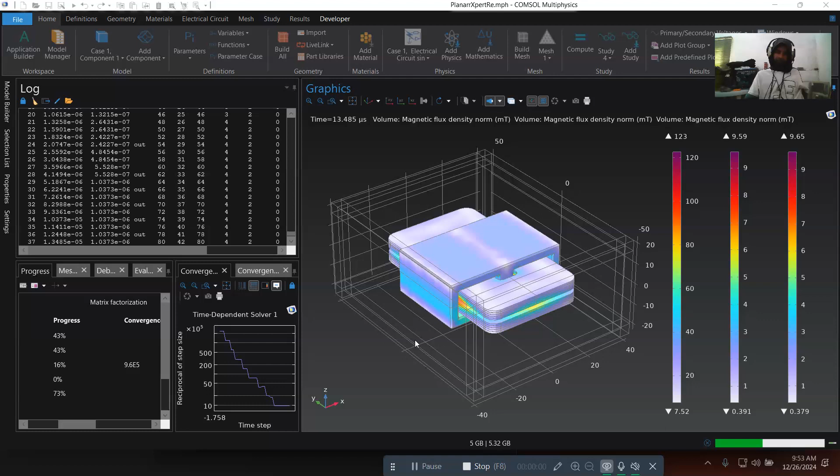Okay, so simulation at 43%, and I notice we're reaching close to a half cycle. So I just want to show the voltage. This is 18 volts, and we have here 14 volts. So you're gonna get a perfect 1-to-1 ratio. So this is really good so far.

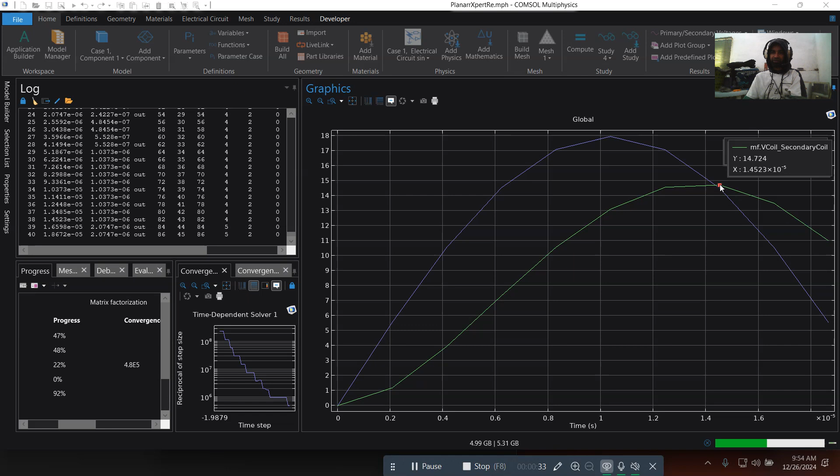14.74, well, 24. You notice I have some high steps, like 2 microseconds steps are set for. It will do pre-adjustment, you can see it here. Yeah, so it's just only 2 cycles doing. And we can see what the voltage settles down to be.

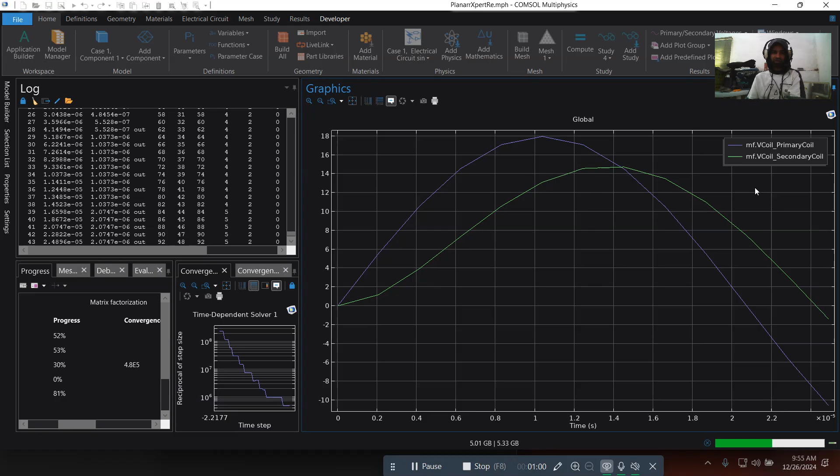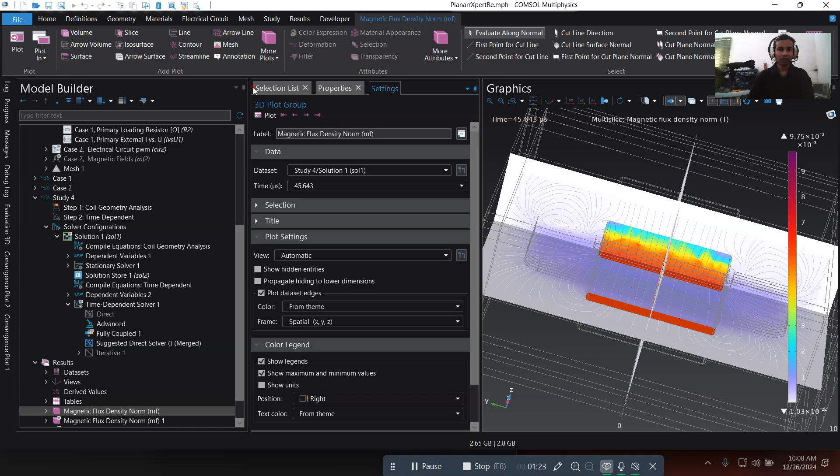Okay, so this finishes here. Let me take a long hard stare at this result. Hide this guy, hide this guy. Pull up the model builder and settings. Right, so you can narrow these guys down, close these guys.

Okay, so we just want to look at the results. I will go to voltage. As I said, do 2 cycles, and that was it. Right, so 1 and 2. So we have, this is the voltage input is plus minus 18 volts, and the coupling we have like

14.682, right? And yeah, call it 14.5 or something like that.

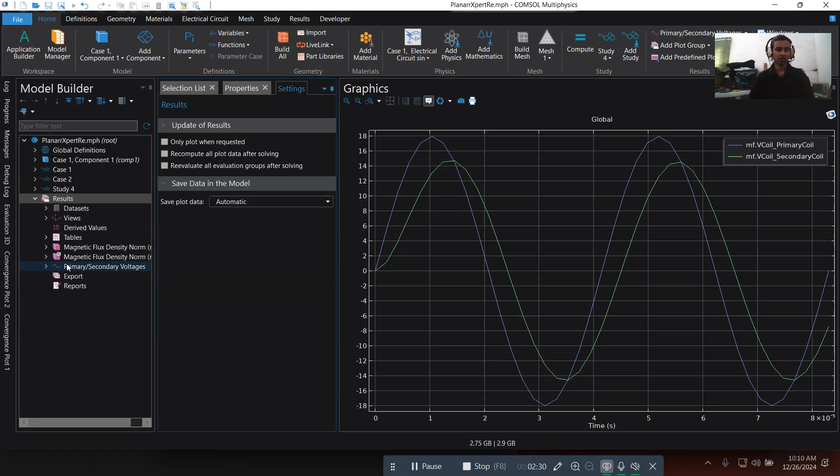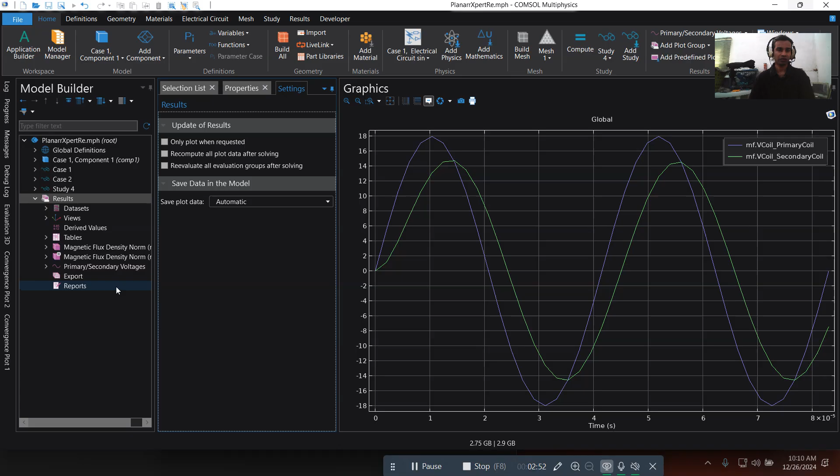Let us look at, we have a resistor for load, which is, we have a resistor for load. And I basically did not, wow, I don't think I'm supposed to have this resistor

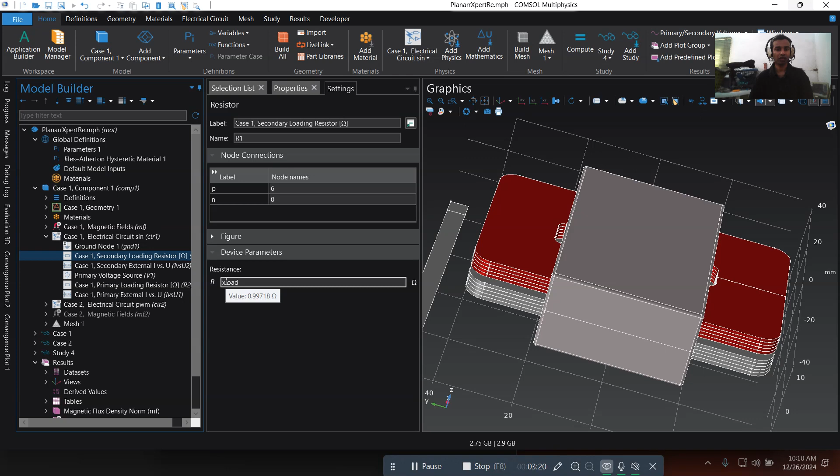divide down by, I wonder if I have it. I will know now. Supposed to be down to rload. Okay, this needs to go down to be less than that. This has to be in p, right? So this is supposed to go down to 200 microohm, 200 milliohms, right? Sorry. So this is supposed to be 200 milliohms.

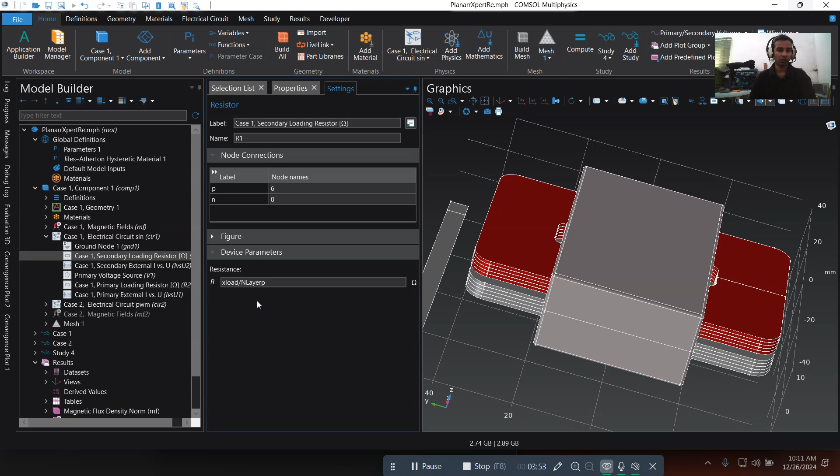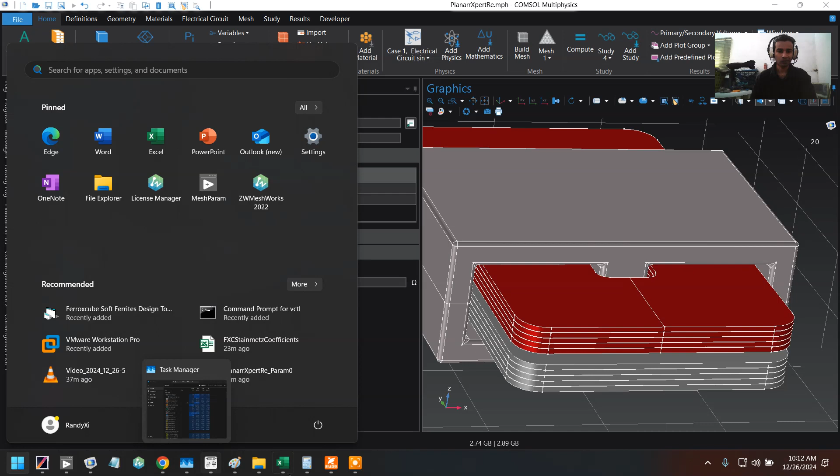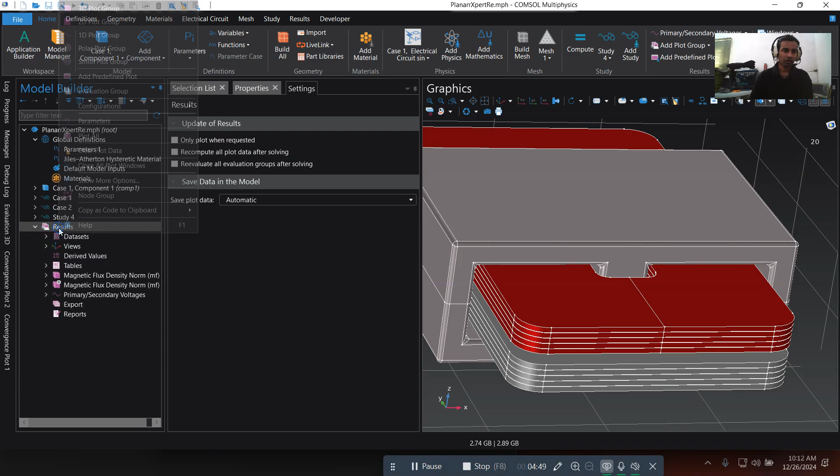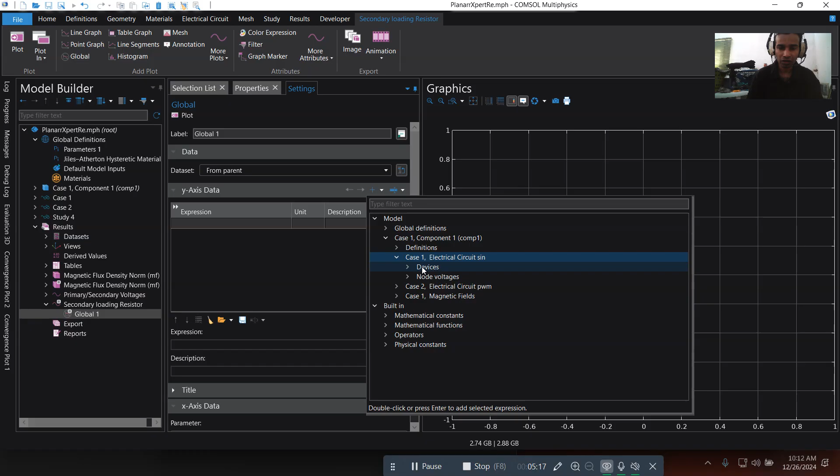So we're going to look at this resistor, is R1. So we look at resistor R1. Secondary loading resistor. And we'll give it a global plot. You go to the circuit, case 1, and we will go to R1 and we'll look at the dissipated power on that. So dissipated power on that is 220 watts, so that is 14 volts,

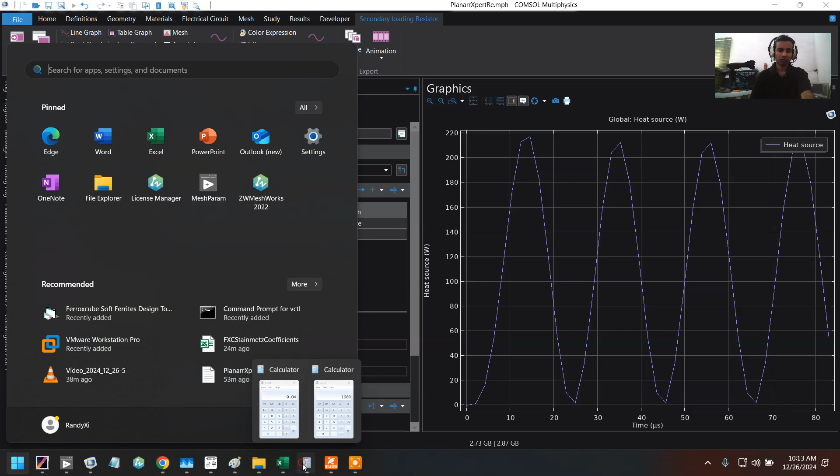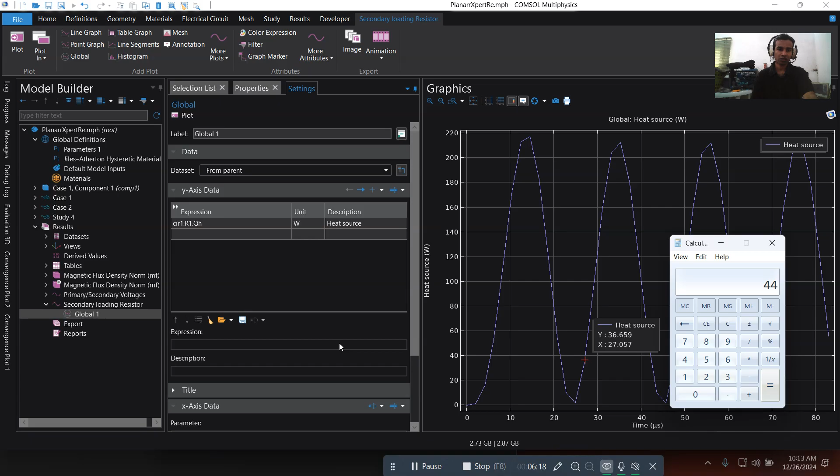right? So this will really be 14, let's say 14.5 volts, divided by 0.9987 something something, whatever. So we have that. We parallel, I'm not sure how it represents across all, but I will determine that afterwards. So if I say 220 divided by 5, 44 watts. So I will look into that, right?

And I had to do the proper loading on this. So that was that. Okay, so that the voltage, look at the flux density, right?

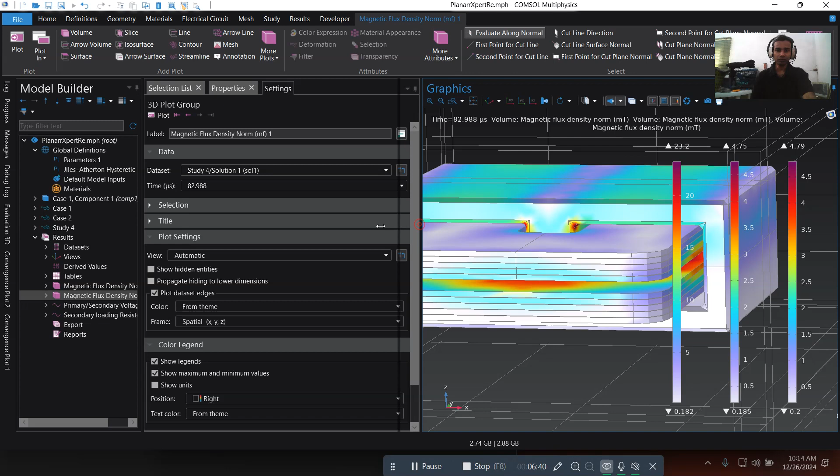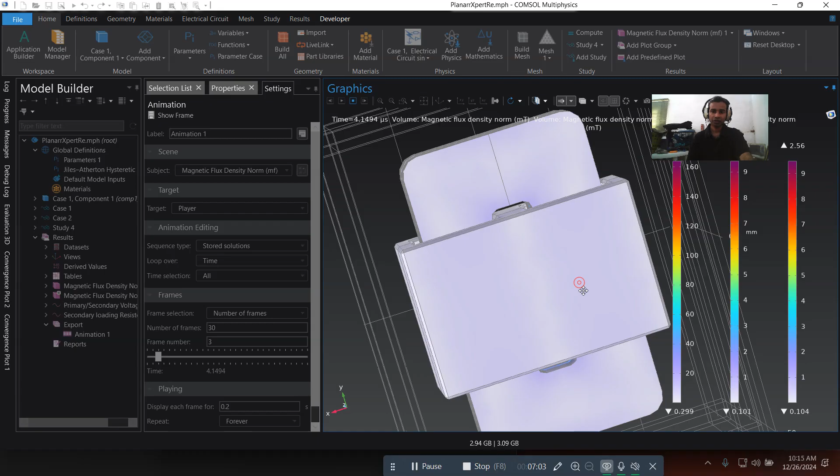Right, so we have the flux density here, and we can see we have an even distribution. Go to here, same thing here. Now you're going to notice something over here. The flux density on top. About that and about that, right? So both of them,

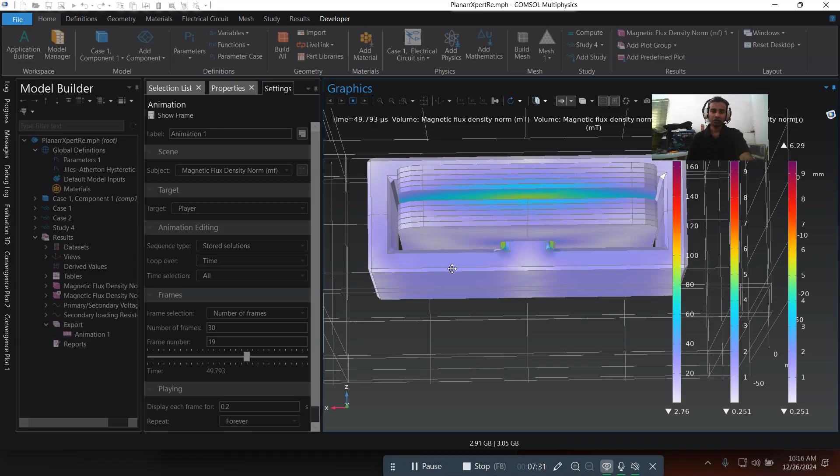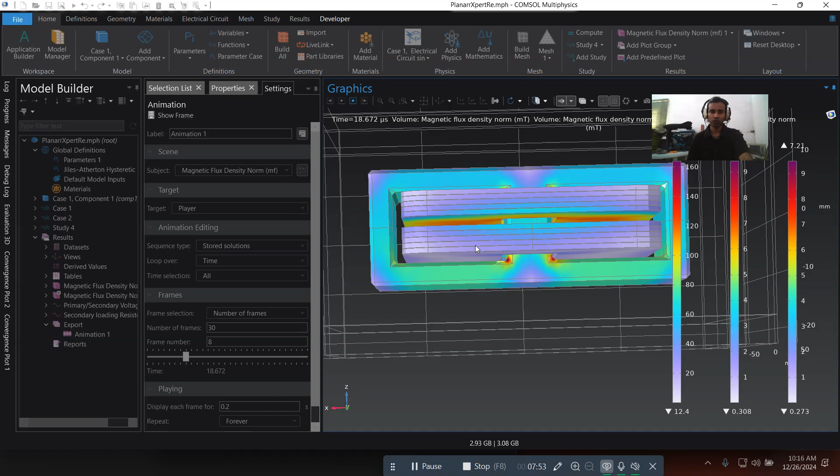let's get this in alignment here. Right, you can notice one fading out and this one appearing. Now the reason for that is the primary coil is generating a magnetic flux that induces itself onto the core, and the core will take that around and induce it in the secondary. So we send in a current to excite the current flow on the primary coil, and we get a magnetic field that will excite the core, and the core will excite the secondary side. And we have a current flow due to the fact we loaded with resistors.

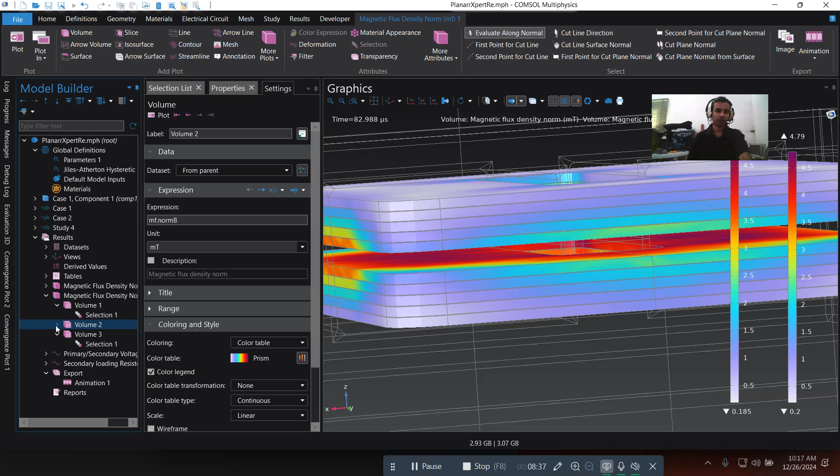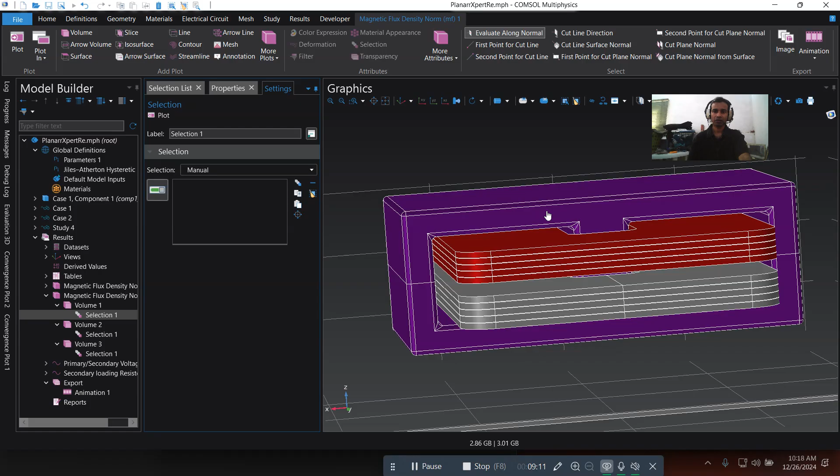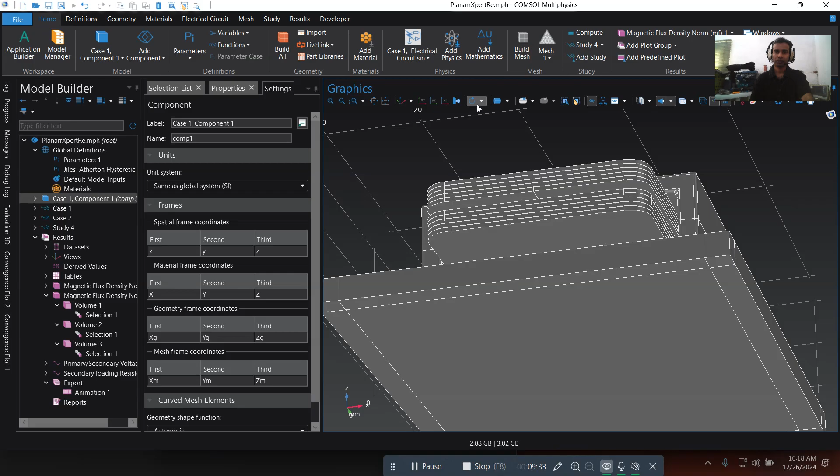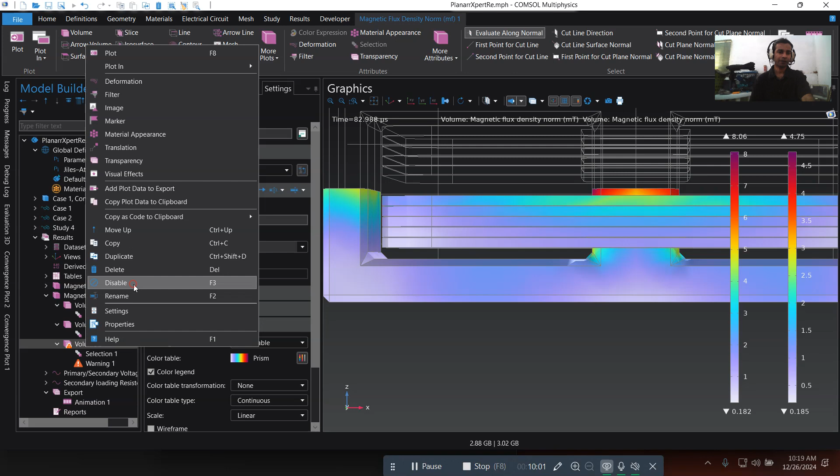Okay, this is what's going on here. I need to clear this box out of the way. Select domain, right. Right, let's come back here now. Right, so that was the issue there, and I will put secondary, in fact I need to put all those guys. This one I will disable this for now, right? And let us go back to animation.

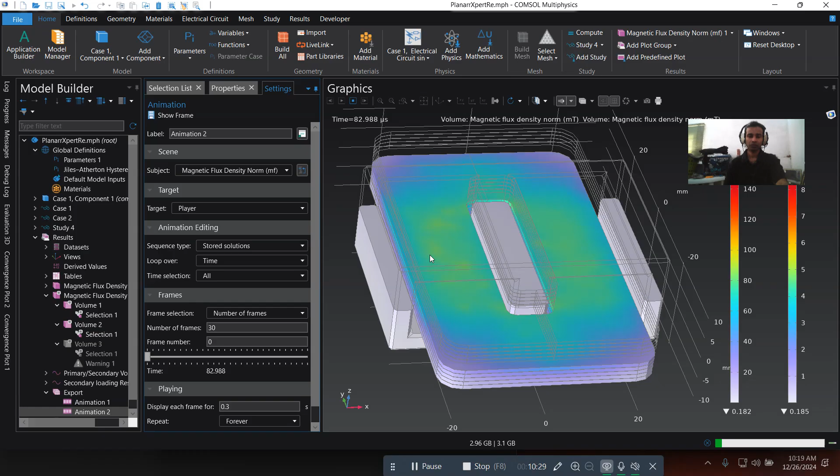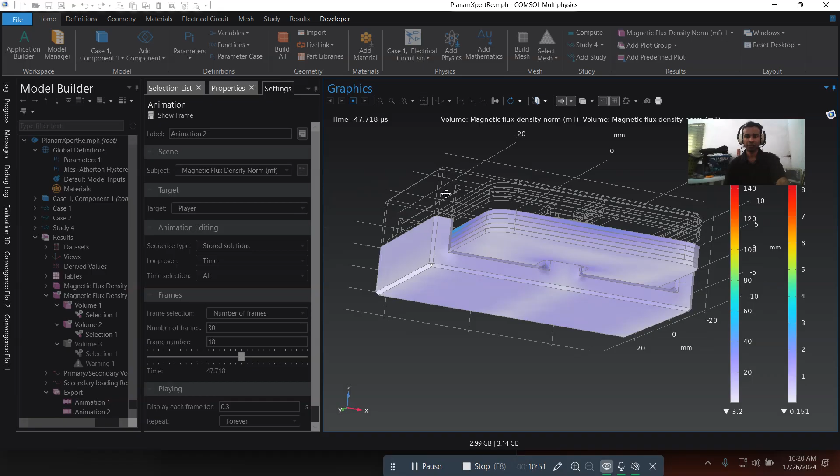Right, as you can see, the density in the core is being excited. This is the primary, right? So this is how it should be, not the garbage I had before. Many mistakes were made. Right, so this is perfect. And it actually works—before it wasn't getting voltage because of those issues with the geometry, and so that's that.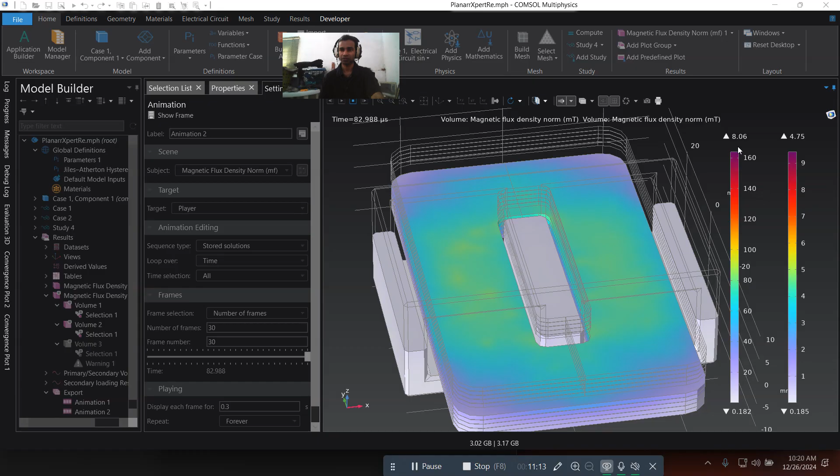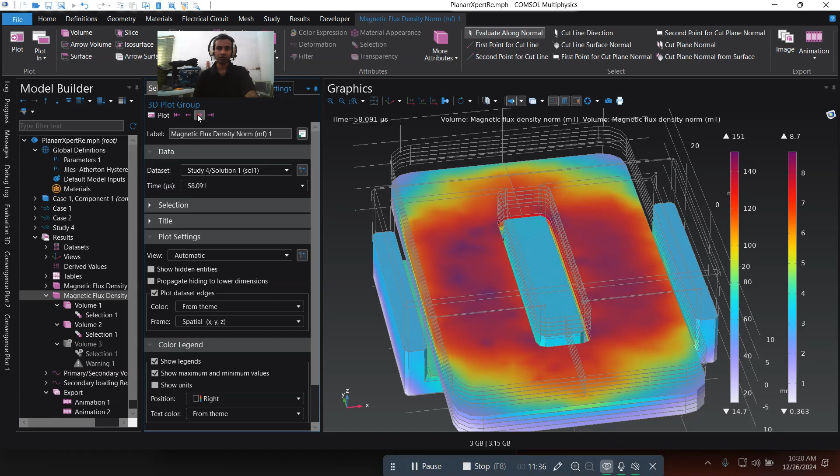We have the millitesla reading. The highest we have is 160 something. I'll try to stop it at the highest. Right, so let us go back here and skim through. Right, come back here. The highest is about here. This region here, we could just move this across the chart, and you can see the 160 around here. If we click here, we should see.

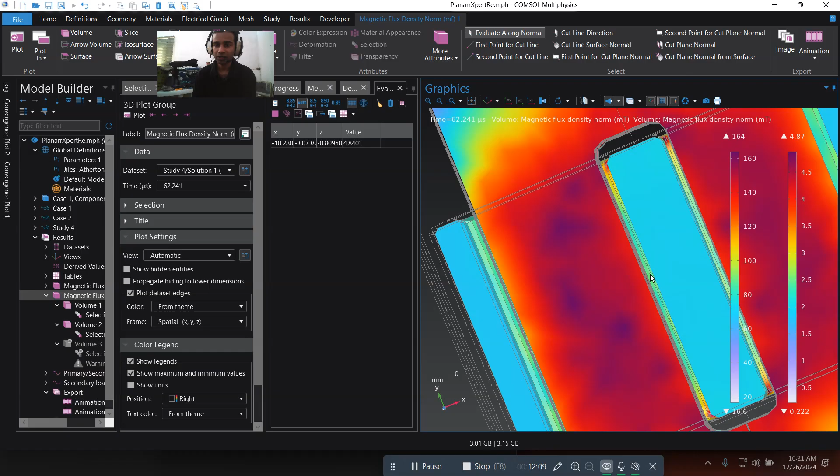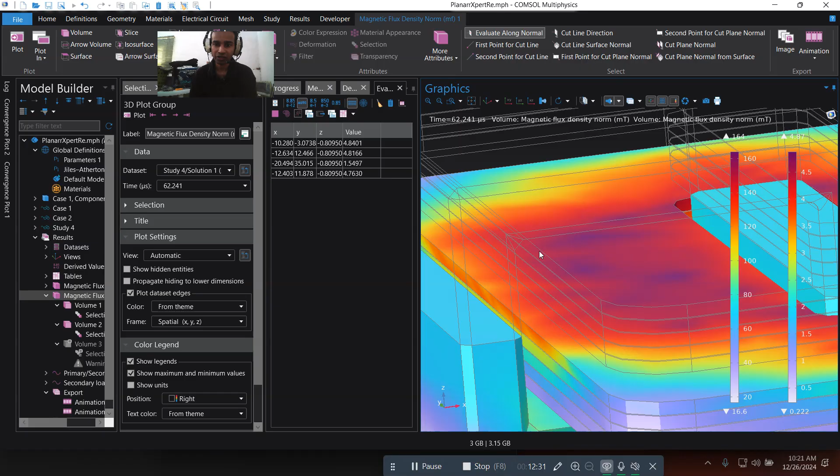Let's clear this here. I'll click a region. The value in this area here is 4.8, and out here is 1 point something. Oh, my bad, this is the core and this is the foil, right? 4.8 millitesla, which is fine. So this core has 4.8 millitesla. The foil—sorry, the core is this region they're measuring, and there was again a peak somewhere. I was looking for that, right?

So the peak is 1 something here. We could come over here, see 160, so we're close to the alignment here. So this is the core, this is the foil, right? The foil is alright in that sense.

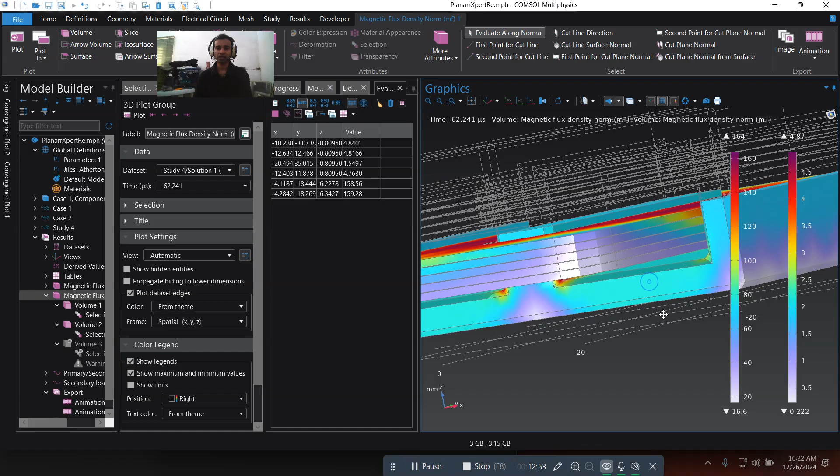We're going to have some issues with heating, so we know we need to get that heat out because this could cause failure in that sense, but we don't have that amount of energy to say that we're going to cause that much failure. I will do calculations for these guys and write it into the software version.

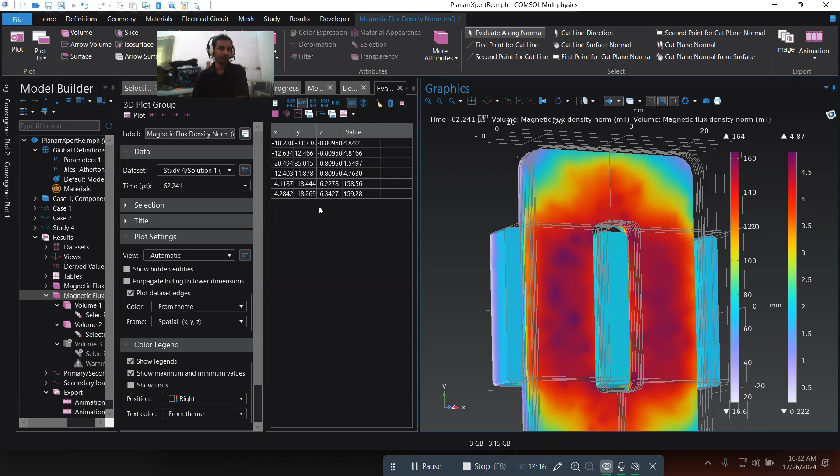Now what is really unique about when I'm doing the calculation is this. This is the unique thing about doing the calculation—with the calculations, everything that I'm doing, we have all these equations going on. Here is about the entire geometry structure, and the frequency, the current, the voltage, the impedance, all these different things, right?

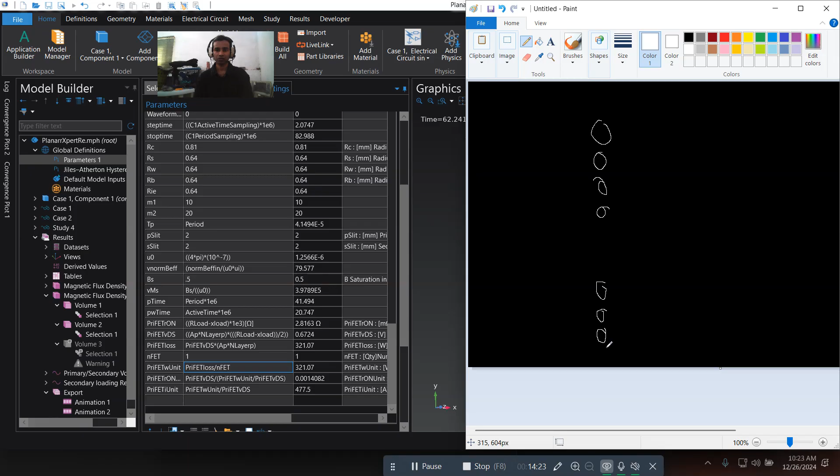So over here now we're looking at, okay, we put a quantity of 5 MOSFETs. If I put a quantity of 1 MOSFET, right? Let us look at something here. So we will just draw MOSFETs, right? So we have one batch of MOSFET here. I would say 2, 3, 4—2, 3, 4, right, 4. So this is MOSFETs over here, a batch of MOSFETs, a batch here, here batch of MOSFETs, batch of MOSFETs here. And these MOSFETs are basically, we have them like a bridge here, and these guys right underneath here.

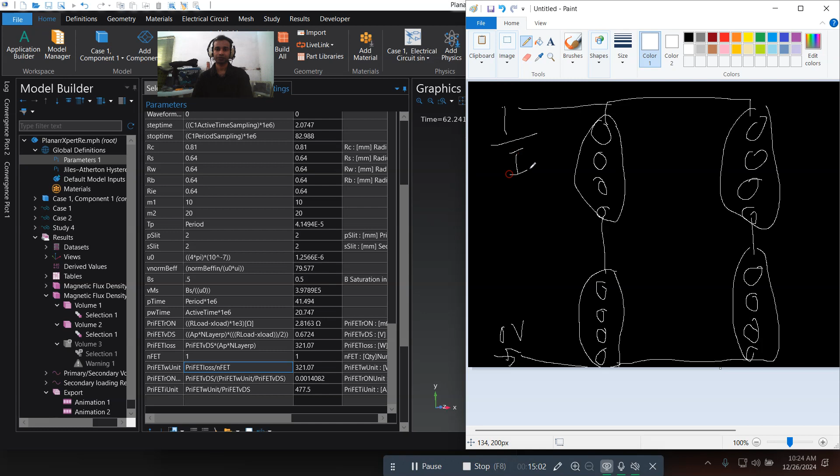So this will be like 0 volts, which is the ground really, right? And this one here will be the battery, which will be your 18 volts, right here, 18 volts, and your transformer coil will be over here, right? So this is an H bridge, right?

Zero voltage transient—that's ZVT, they'll call it zero voltage transient. Some might call it ZST, ZVS, things like that. So we have zero voltage transient itself. When this switch closes, it will have a resistance here, and when this one closes, it'll have a resistance here, right? So we have a resistance in all these guys that will have a voltage across it, and also a resistance there at a current flow. So each MOSFET will have a current flow, a total current flow, a total resistance, while the voltage remains the same across all, right?

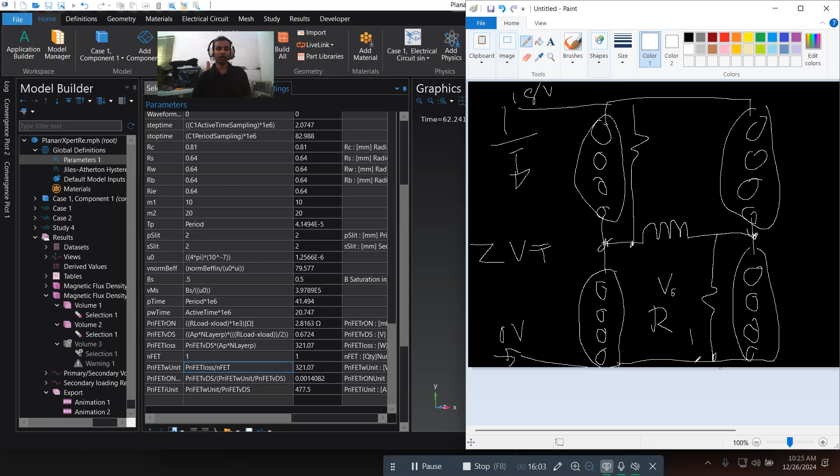If we have group 1 here and group 2, right? Group 1 and group 2. We have one MOSFET here for group 1. We are seeing one MOSFET over here represent, like we say, remove all 3 MOSFETs and have one MOSFET. That MOSFET will have a power rating of 321 watts. It will have an on-resistance of 1.4082 milliohms, or ohms here, and the current flowing through the entire circuit here will be 477.5 amps. Now if we put 2 MOSFETs, we get 160 watts.

So for argument's sake, put 4 MOSFETs here, and since we're running 4 MOSFETs, the MOSFET dissipation heat per MOSFET will be 80 watts per MOSFET. The current handling of each one of the MOSFETs will be 119 amps. The lowest—well, the highest ohmage that you could go to is 5.6326 ohms, milliohms, right?

So each one of them will have that. This is the configuration of the MOSFET that you need to match, per MOSFET, so you'll be able to drive the transformer. If I put a 5, I have 95 amps at 7 milliohms.

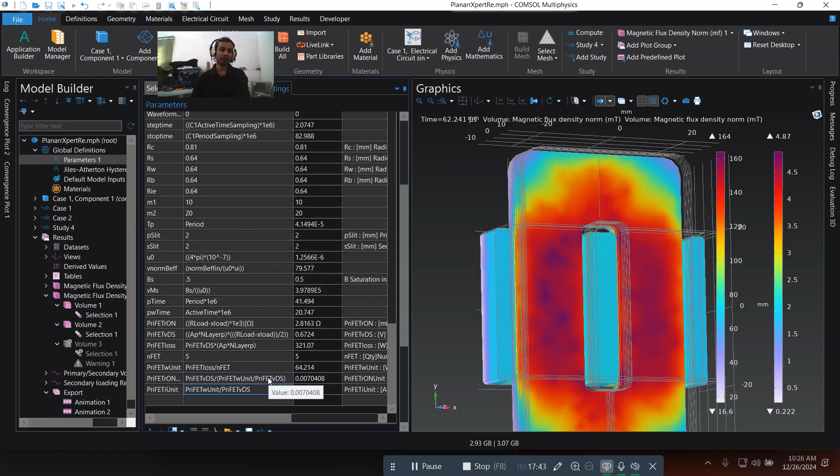Now when we're trying to match this, we have a gate region, which will be, we have a MOSFET, and this MOSFET here will have a capacitor value here, and this area here will have a capacitor value over here, and across this region here will have a capacitor value here.

So we have a gate capacitance, and once we apply a voltage coming up to the gate capacitance here, this has to conduct this capacitance here, and this one here will come straight across here. This capacitor will double with the capacitor here.

So just to take into account, we have our power losses discharging this capacitor, which is when we close it, we discharge the capacitor, so heat releases, and this from the drain will bring it down to the source. So this capacitance from here to here will come and join over here, and we end up with this capacitor across here doubling. So the capacitor that doubles here will have a heavier current that's going to divide over here, so we have all these effects happening that will cause an issue.

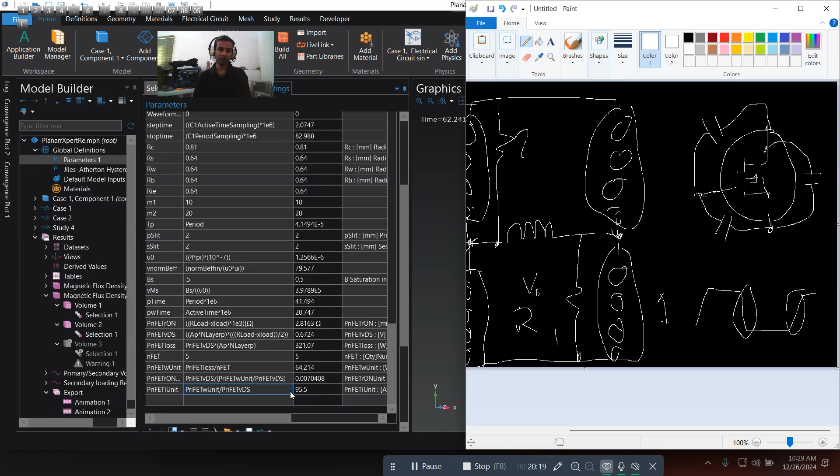Meaning now, this region here is your rise time and fall time. This is where all your heat starts to occur in your MOSFET. So you don't want that, so you try to match that. Now if you use some powerful MOSFETs, you could think that you're pretty much handling things good. Well, to a point.

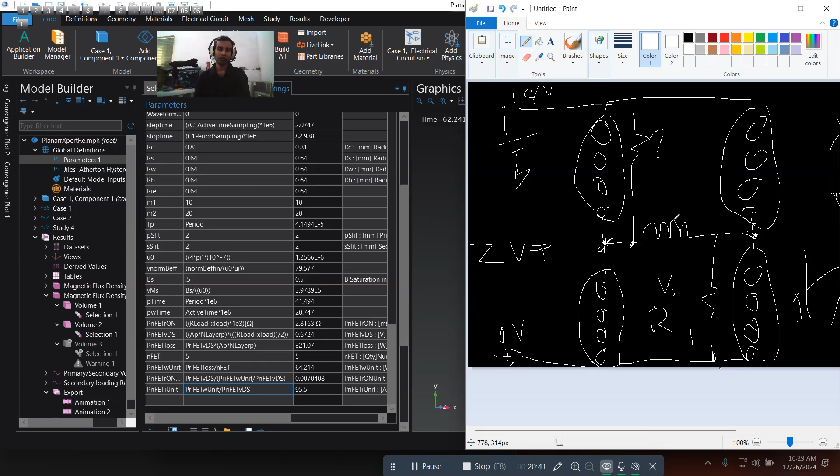You will end up with a longer slope, because the gate junction has to carry much more current, you will end up with a larger slope. So the rise time and fall time will be very lengthy in time, and you will end up with issues where we will consider those issues to be something like this.

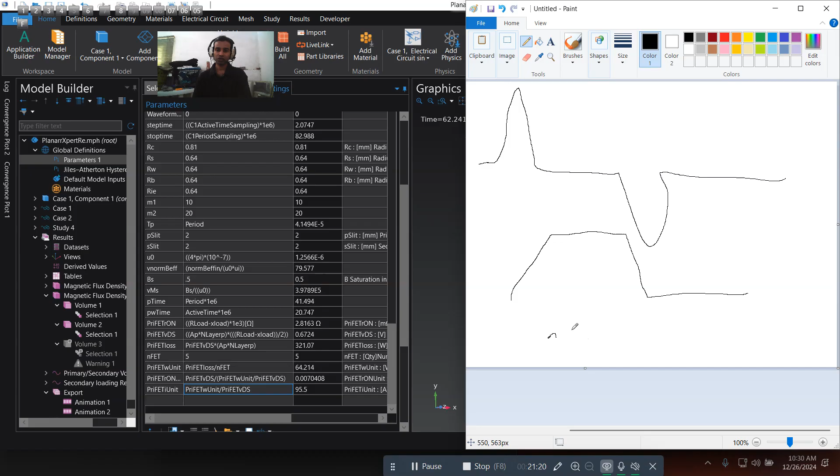So when we have a power surge, we have a power surge like this and a power surge like that. So let us say the transistor itself has 0.6 volts, because we have 0.6 volts across each transistor. So the transistor, the region over here is 0.6 volts at 95, 95.5 amps.

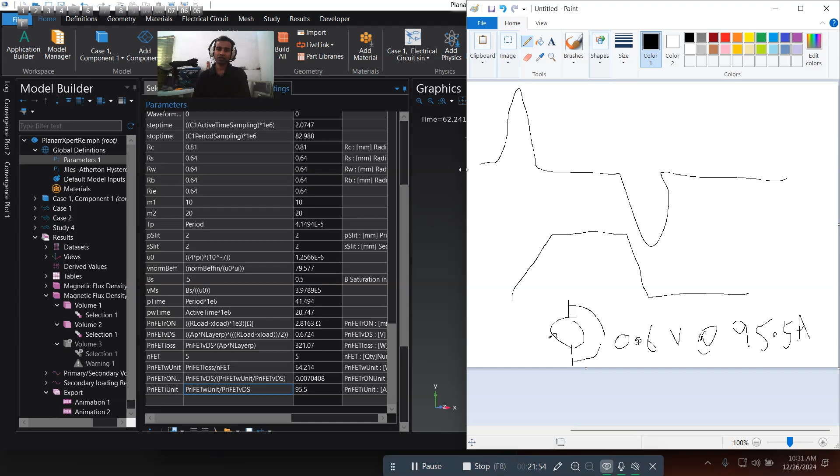So we have this voltage across here. This multiplied by this equals the wattage that we see here, which is 64 watts. Now when we're looking at this, we're looking at a situation where we will have 60-something watts in this region here, 64 watts.

And this lengthy amount of power over here, let us call that probably 1000 watts. So this is 1000 watts during rise time and fall time. So due to duty cycle, frequency, and time, there's math you could work that out. I didn't bother to do that. That is part of the simple engineering.

So that power will be showing up. It's not happening in this region, it's happening in this region here, the rise time. So you want to have your rise time sloping as much as possible, sloping down. So we do have to deal with that region of energy.

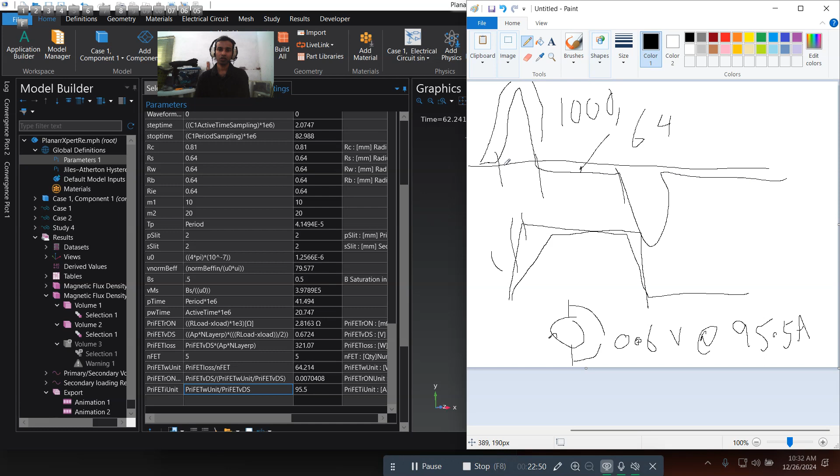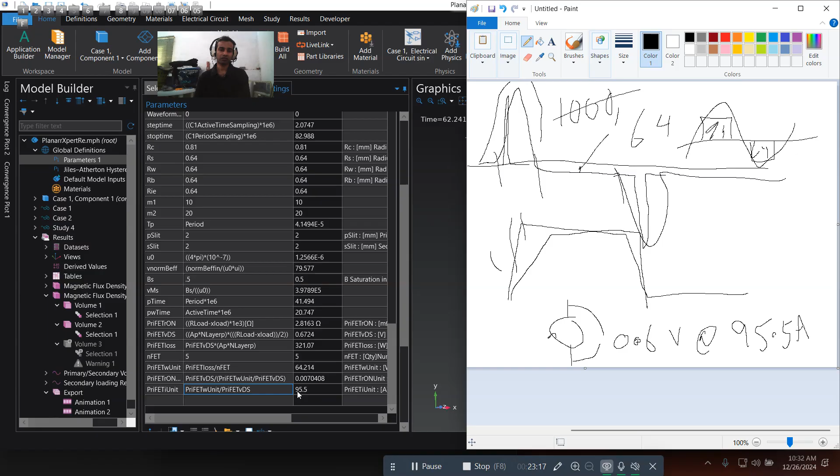We will get a very narrow pulse here, which is minor, and this pulse will be very minor. When we do the math, we will recognize that we have a lower power rating, so we need to distribute that. That is something like a sine wave, which has root mean square, that's useful energy here. We could use these areas here, technically something similar to that. So we try to get no problems with the MOSFET itself. So that's that.